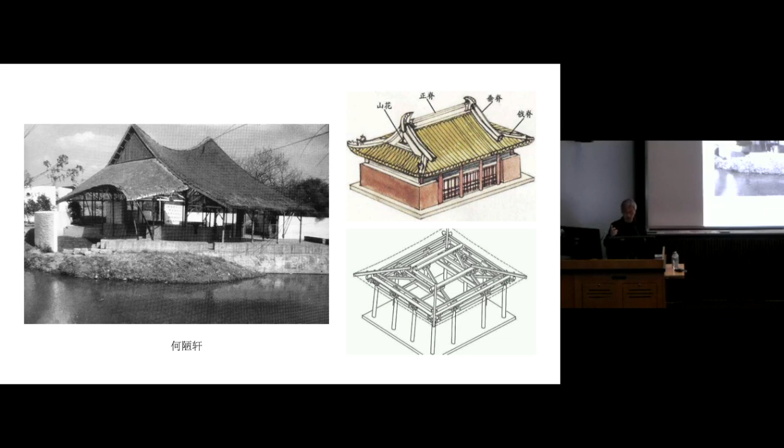The roof of the pavilion follows the form of the xieshan roof—maybe in English we call it a saddle roof, I don't know, in Chinese traditional architecture. But apparently the pavilion is built differently from the systematically xieshan roof. Deciding on a certain style of roof is surely an intentional cultural choice, because it is in a park with an existing tower from the Song Dynasty, and the architect wanted to respond to the Song Dynasty legacy with such a building—both related and keeping a distance in time.

It combines local bamboo lashing techniques with contemporary roof structures to present a free structural form. It could not have been carefully calculated, but it manages to perfectly support the roof, cover the space, and adapt to the intentional height difference and horizontal twist. Yet every pillar just fits the cross point of the square paving.

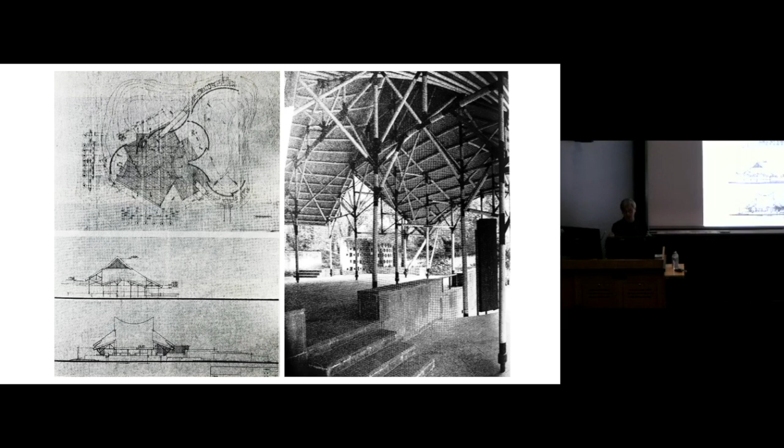The architect gave up the modern construction system and left the construction of the structure to the craftsman, but in an interactive way influenced the craftsman's working. In general, this modern design made an Asian architectural form more primitive.

These three architectures range from a somehow casual design to a formal one. They share certain features, from relatively informal to formal structure, which results from the sensitivity towards the site, the materials, the climate, and even cultural conditions. So it's rational, and finally it completes a kind of structurescape.

A structure created in this way is not just a specific structure, but also a poetic composition or decomposition of the building system. They are all tectonics and originated from the region, but after maturity it was linked to the region's countries, such as Chinese timber architecture or anything else. But modern technology has deeply changed the regionality of building systems. The important thing may not be the change itself, but the new opportunities in the change, the possibility of new poetic construction or something else.

The sunshade looks like a casual decision, but reaches a sensitive balance and plain poetry. It does not just refer to a structural balance, but also to the synergy between that contemporary black shading cloth and the age-old archaeological sites it covers.

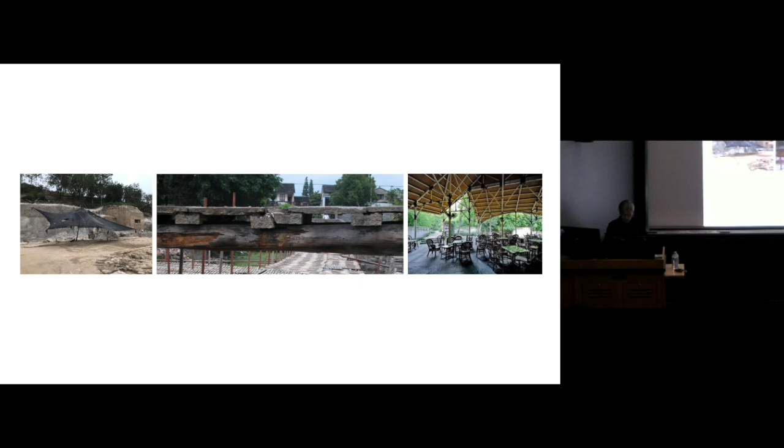This is the Long Museum West Bund. We began to work on it since the end of 2011. The site used to be a wharf for transporting coal. Most of these industrial wharves moved out of Shanghai since Expo 2010. This photo was taken in 2008. Now it's become a public space of the city.

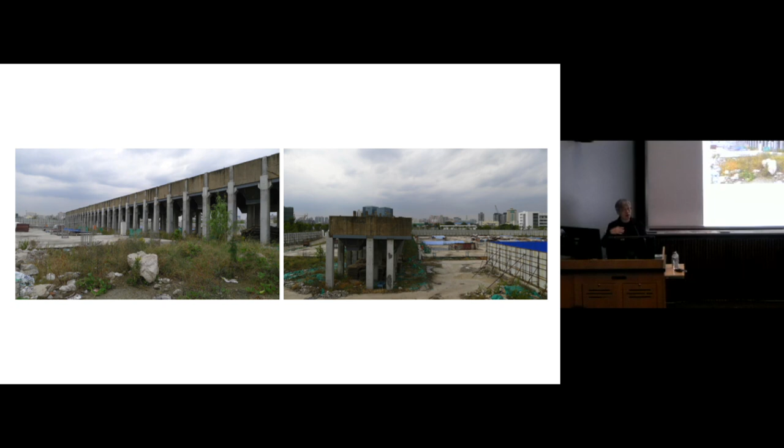When we started this project, a two-story underground car park surrounding the coal unloading bridge was already built two years ago. However, this coal hopper unloading bridge was preserved. It's around 100 meters long and 8 meters wide. This is the plan and section of the formal design for the existing basement. On the right is how it would have looked, planned to be a tourist service center. The part above ground was not built.

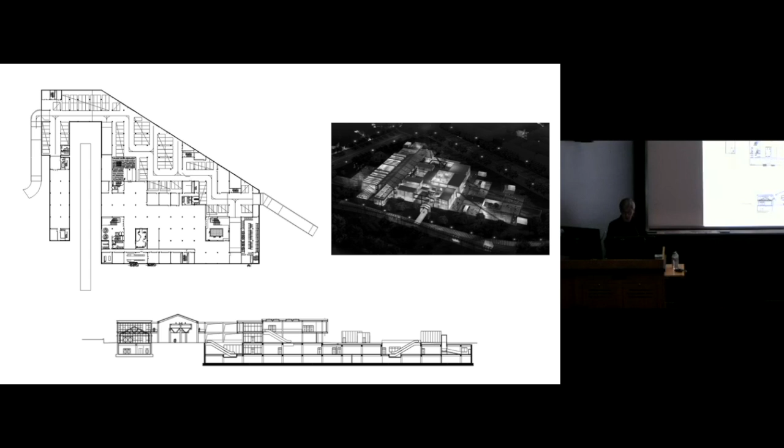We can see the underground structure plan is a standard 8.4 by 8.4 meter column grid, designed for the economy of car parking. Since most regions in China require the design to be strictly earthquake-proofed, normally whatever the function is above ground, the underground structure would simply extend upwards. The columns would be wrapped in division walls or exposed in the space with no direct relation to the specific functions, just supporting the floor plates of the building to provide usable space.

On the opposite, here we see this hopper for coal loading. Even though it lost its function of transporting coal, we can still read from its structure the body of the trains and how the coal was transported there. It shows a simple but strong will in the making. The meaning of the structure is certainly suspended as the function is removed.

This somehow represents the destiny of an architecture in the future. If a city is willing to preserve these structures without a function, it means architecture has to prove a value beyond its use, but it starts exactly from functional purpose. This should tell us that only if the structure of the architecture can also carry a purpose, such as a purpose for use, can it retain more lasting historical value.

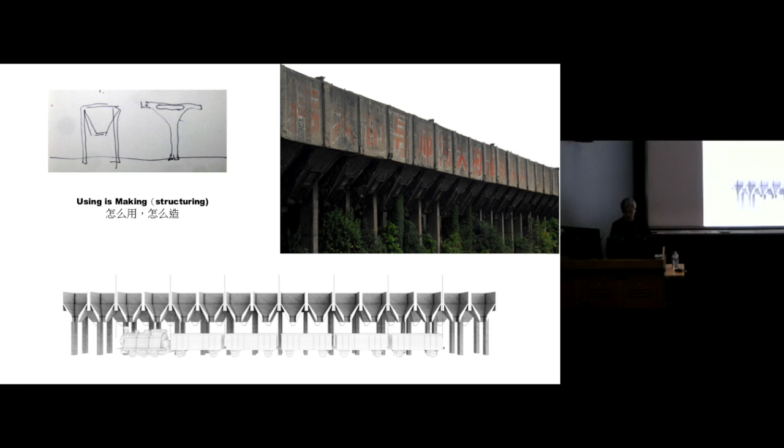We had to design an art museum on such a site. Traditional art museums originate from palaces and villas, and this layout of going from room to room has always been a standard pattern for museums.

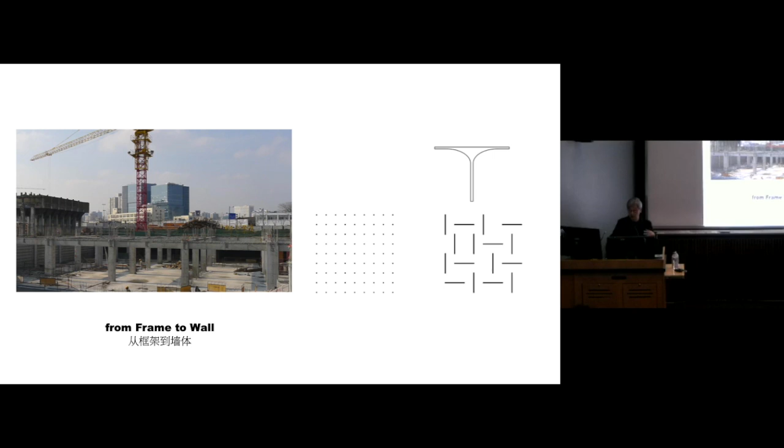I came to realize that paintings and artworks are attached to the walls, not the rooms. It is possible to have a more flexible layout, so we came up with a space with independent walls where people can roam around to see the exhibitions. These independent walls are built upon the standard 8.4 by 8.4 meter column grid of the existing basement economy car parking. Thus, an art museum has adapted its function to its structure through arranging the walls, and has adapted to the existing column grid system too.

Sure enough, the special thing is it is not just a simple vertical wall, but a wall structure combined with a covering roof. In fact, the walls, each made of two pieces, climb the old structure, growing upwards and expanding into individual structures we call vault umbrella units. They group with one another until they cover all the exhibition space.

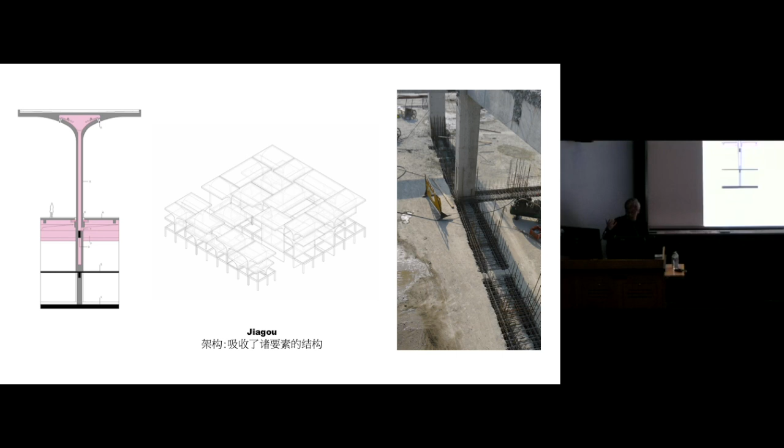The void in between the walls, shown as the pink part, is for mechanical equipment. Thus, as we figure out the adaptation of structure and function, we also deal with the mechanical system, and together they solve the spatial issue. The spatial issue also includes the gaps to allow skylight, as we make each vault umbrella unit independent as a complete structure, detached from one another.

This is how a functional concern also works out for the atmosphere. Of course, material is also relevant, as cast finish concrete.

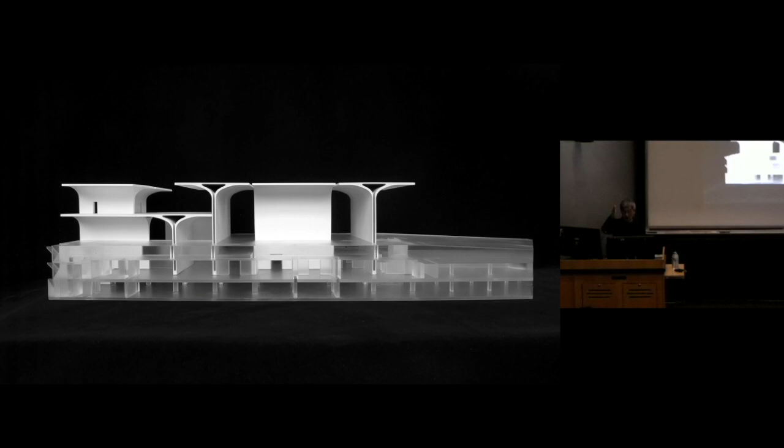In this model, we can see the relationship between the new and the old structure. The new walls are based on the original column grids, but form a rather free exhibition space. Sure, there are many ways to combine the walls.

Finally, we decide on a layout with diverse spaces that are symmetrical, rotational, or diagonal. The fluidity of the space is important, and it's the simplicity of the very structure resulting from various intentions that build up an analogy with the existing coal hopper on the site.

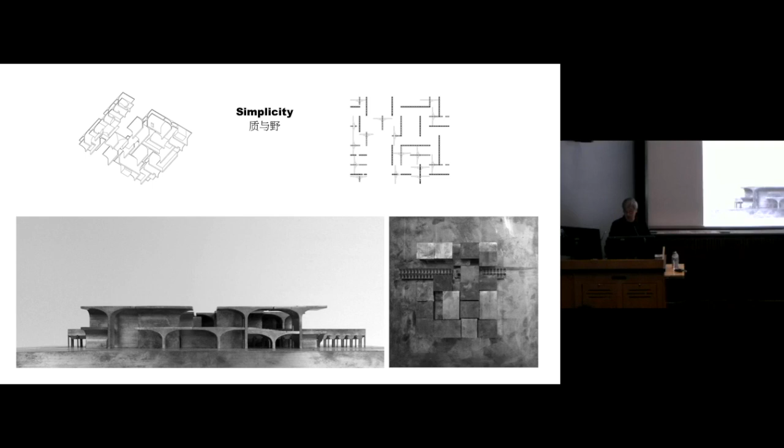When we describe the notion of covering as tree or umbrella, we are actually mentioning the human body. This is a metaphor based on the perception of our body. From its point of view, there is not much difference between Chinese traditional timber architecture and this concrete architecture.

In the summer, when I was walking in this temple from the Jin Dynasty, I immediately thought of the just-finished Long Museum. A photographer, Walter Mair from Switzerland, asked me for keywords for this space during his photo shoot. I did not think for a second. I said ruins. He demanded to turn off all the artificial lighting and took this photo.

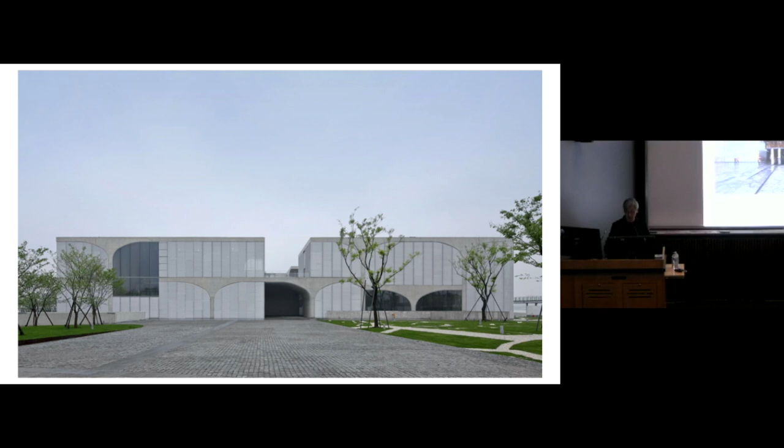The new structure of the museum, along with the existing coal hopper unloading bridge, forms the public space leading from the city to the riverfront. On the facade of the museum, we can clearly see the structural and spatial composition of the architecture.

The interior space is also made by the concrete structure unit, a vault umbrella structure. In this space, numerous exhibitions took place. Every exhibition seems to be tailored.

They all reacted to the space, each in their own way, and so each one of them is unique. Even though the space is so strong and remains the same, people still remembered almost all the exhibitions in this space. These photos show the activity of people inside and outside the building. It has become one of the most important and cultural spaces of Shanghai.

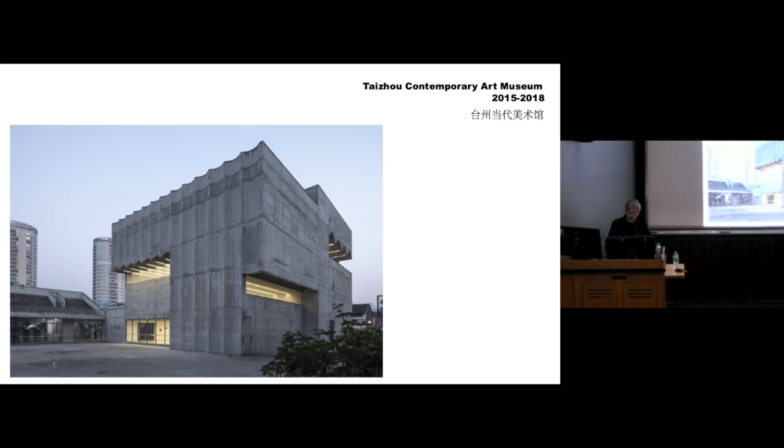This is the next project, Taizhou Contemporary Art Museum. The design started in 2015, soon after the completion of the Long Museum. Taizhou is a small city in the south, about 3 hours from Shanghai by high-speed train.

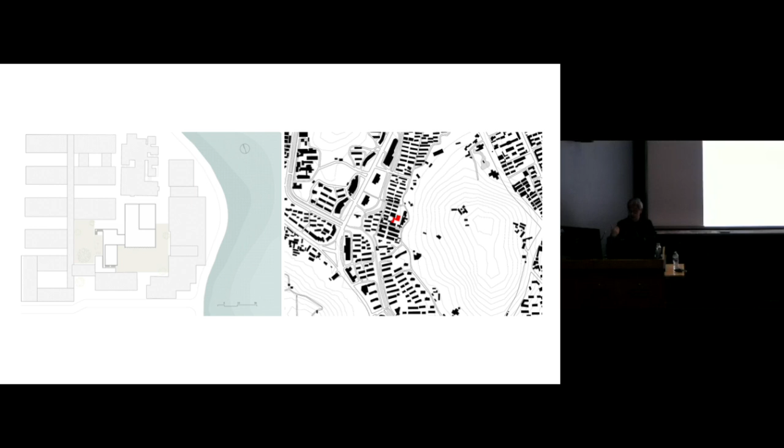It sits in a former grain depot area, which had been transformed into a commercial area. The developer keeps a piece of the land for a small art museum, and to the south of the museum is a small plaza, facing a mountain to the east.

In an art museum not that big, we don't want to take too many stairs to reach the next level. We designed a staggered space for exhibition so that we can go up only half a level to reach the next exhibition hall, and we cover the space on each level with parallel vaults.

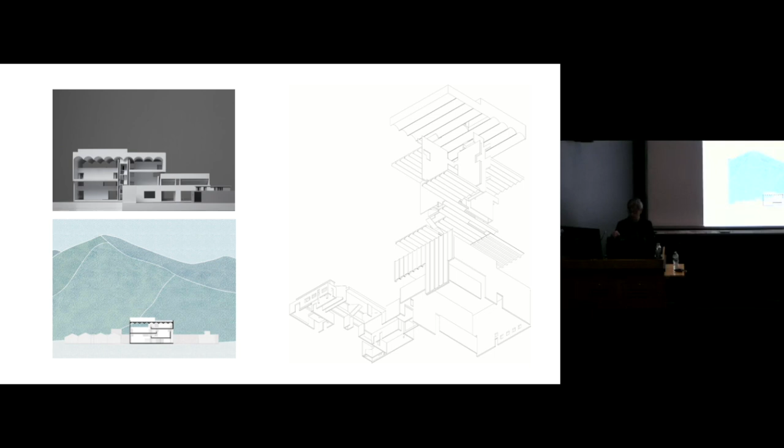These are two model photos. The left one shows what's unusual about this structure. Normally, such a strongly directional vault structure would be supported on both ends, but here, the end of the beam is missing. We can see on the right, actually, the end beam is just upturned.

The upturning structural beam made the vault structure seem like it is floating in the air. The mountain in the distance is involved into the building. On some other facades, the floating vaults are placed upon semi-transparent glass.

On the inside, this seems to be a liberation of structural force, followed by an acceptance of the exterior environment with a certain attractiveness, but on the outside it still looks very solid.

The facade facing the plaza also applied walls with a similar wave form. It seems like the interior is unfolded to the outside due to constant construction errors and discontinuous building process. The facade of the building presents an unexpected texture.

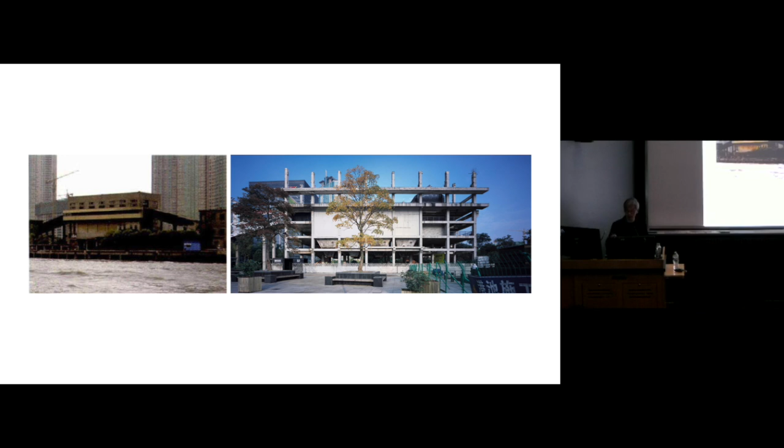It is an art museum and an additional walkway. It was also a coal bunker, almost demolished completely under our suggestions. The client agreed to retain this original ordinary industrial structure. By the time the roof and part of the walls had been removed already, it had to be pulled down because the existing structure could not meet the functional need for the new building.

And the client never thought that the enclosed hoppers could become an exhibition space. We applied a huge roof truss on the top and hung the new structure below, which formed the cantilevered additional surrounding space. Thus we can prevent the destruction of the existing structure. It had been inserted into the existing structure.

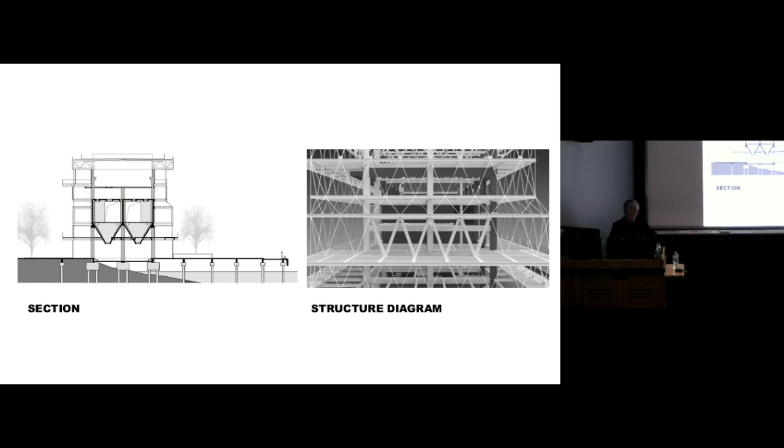When we looked at its new structure attached upon the existing old structure during the construction, it seems like fishnet leggings, or also the artwork wrapped trees by Christo and Jeanne-Claude.

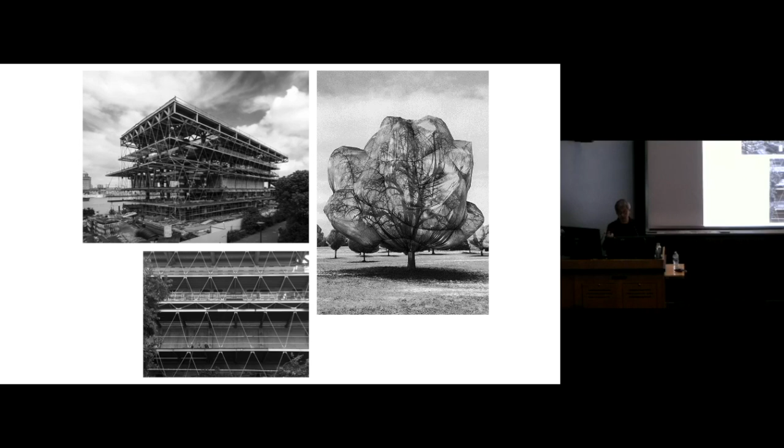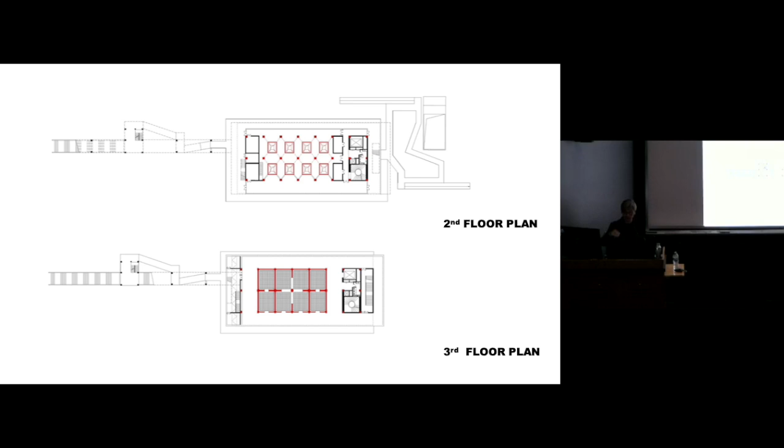The existing structure is in red, and surrounded by the suspended structures are increased exhibition space. The building has a brand new appearance. Apart from the steel stairway on the left, we can barely see the trace of the old building.

This suspended structure also adds exterior open space to the building. The platforms and corridors build up a sense of publicity and landscape, which the former enclosed industrial buildings did not have.

A brand new architecture has an old coal bunker at its core. The entrance hall of the building is covered with the existing coal hoppers. The contrast between the inside and outside is also unique to this architecture. Exhibitions can be held in between and even inside the coal hoppers.

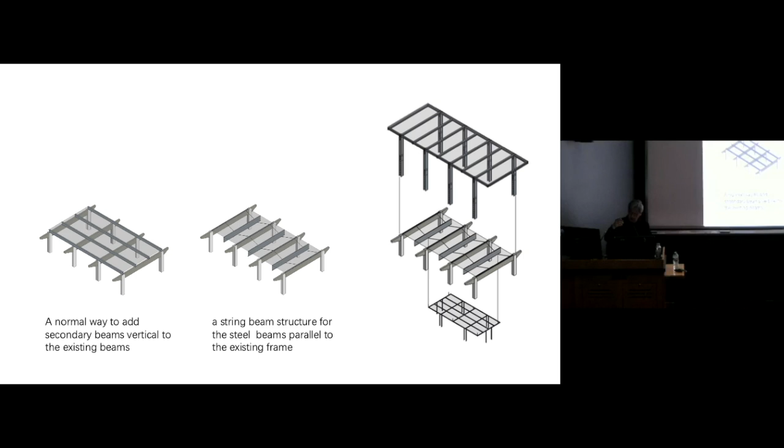So we thought it through and applied a string beam structure for the steel beams parallel to the existing frame. It seems like the structure is somehow floating in the air, but seeks to stress and distinguish the existing frame beams. The glass boxes suspended from the new steel string beams are flexible retail spaces.

The new structure seems to be just suspended there. The existing structure seems just like it's right here, as natural. On the rooftop is an elevated walkway along the Huangpu River.

A newly built architecture seems like it has been there for a long time. It is not only a part of an art museum, but rather a part of the city, the riverfront.

This is our old office. Following the completion of the Long Museum, we also moved our space to the West Bund. We became closely related to the urban regeneration of this area. This space used to be the repairing zone of the Shanghai aircraft manufacturing factory.

A main warehouse is transformed into the West Bund Art Center. Surrounding it, some temporary artist and architecture studios are also built, along with some art galleries. Our office is among them.

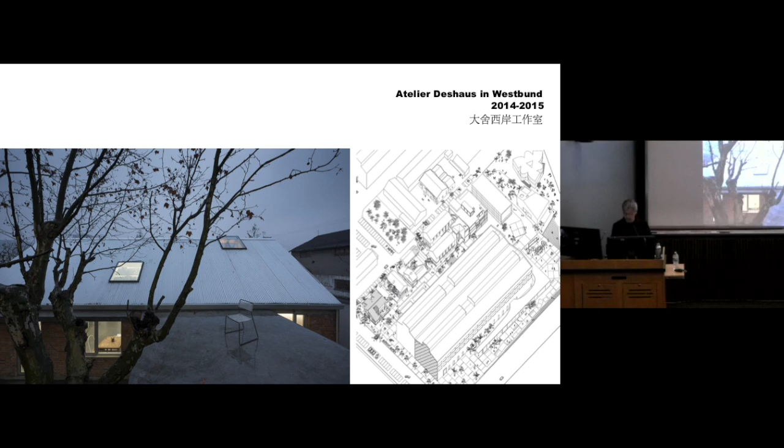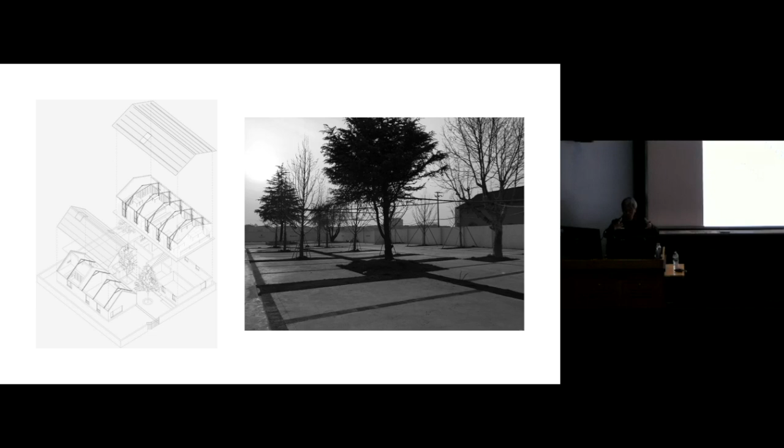The site of our office is in the parking space of the former aircraft factory. We wanted to reduce the cost by using the existing concrete ground of the parking lot as the building foundation. The two trees at the front would be enclosed in the courtyard.

Building directly upon the parking lot, a concrete ground, instead of building a new foundation, leads to the decision of applying a brick wall structure on the ground level, so as to distribute the load transmission. And so on the ground floor is mainly small functional space.

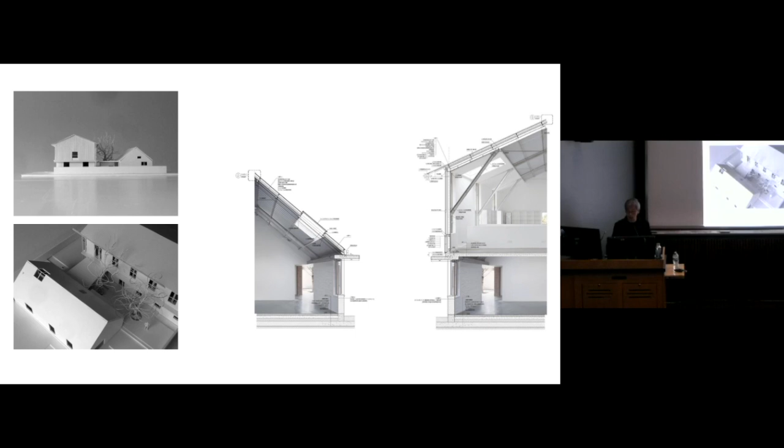On the second floor is a large space with a light steel structure, our main workspace. This is a workspace on the second floor.

One special thing, we put the main structure column at the middle of the window, so that the columns and window frames are merged together, and the steel columns can get rid of the cold bridge effect with the heat insulating window frames, so that the walls of the upper floor don't have to be too thick.

The structure is also clearly presented in the space on the upper floor. The supporting roof truss is an important element for the spatial atmosphere. It is also related to the industrial history of this space, but the structure is not completely exposed. A section of the ceiling makes it bright and comfortable.

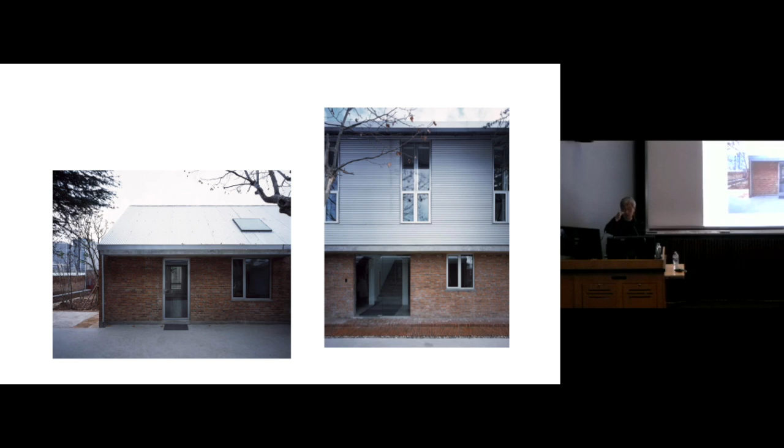The elevations of the buildings honestly reflect the relating structural forms. The skylight of the ground level meeting room and office let the trees become a part of the shelter of the space. The sunken part of the rooftop terrace guides the rainwater to where the trees are.

This is a tea house in the same art village, just near our office. Also in this art village, also demolished this June. It is located in...

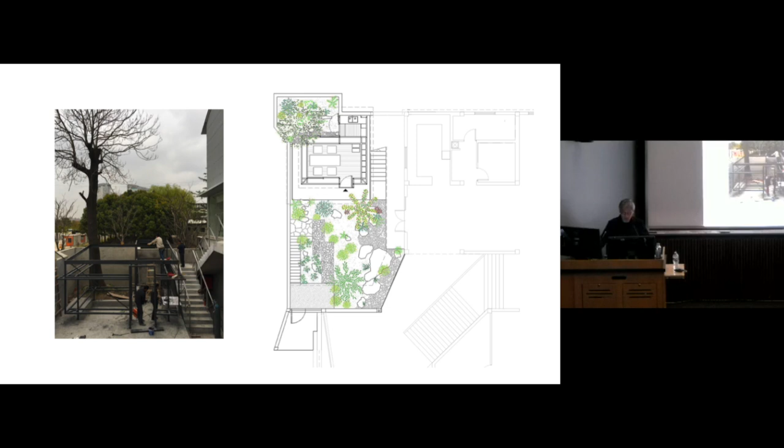It was located in a 110 square meter courtyard, a courtyard with a tall tree. The yard is tiny, especially compared to this tree.

The tea house closely sits on the tree side so as to make space for the yard. It makes the tree seem not too big in the small yard. Another benefit is that the tea house would appear to be really small.

The tea house uses really thin steel structures with all columns and beams at about only 6 centimeters wide. Compared to the tree trunk of 90 centimeters wide, the columns and beams of this width barely count anymore.

Usually in our architecture of wooden structure, the size of the beams and columns are the same size as the tree trunks. In order to reduce the footprint of the tea house as much as possible, we also turn the interior seats into part of the architectural structure and elevations.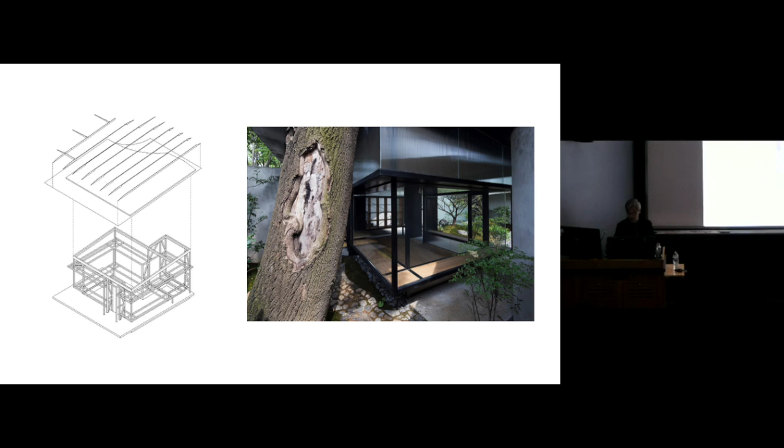We can see on the left the envelope structure of the building is cantilevered layer after layer. Also, because the tea house is reduced at its lower part, in reverse, we would hope to rather expand the upper part so that it would not feel too packed on the inside.

Our demand for space on the upper part is much larger than that on the lower part. As for the yard, the house should take up as little space as possible. So on the envelope of the building, we can see the seat height at...

45 centimeters, a human standing height at 1.8 meters, and the roof height at 2.5 meters. Architecture is a metaphor of human bodies, human scale.

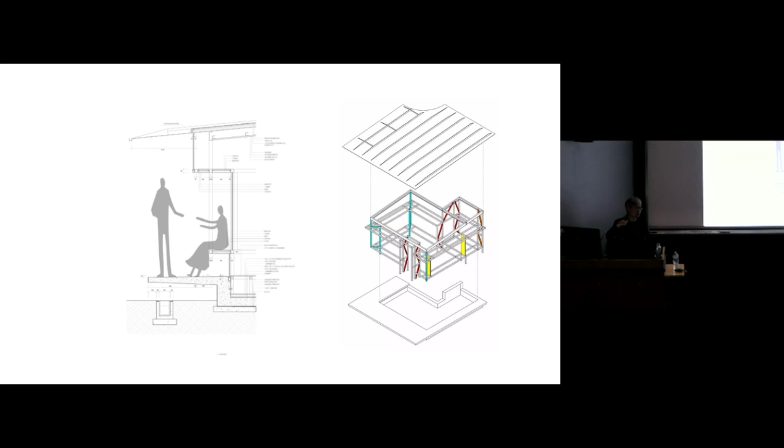Meanwhile, the architecture of furniture is also blurred due to the scale of the structural elements. Structure is both of architecture and of furniture. In this way, a direct connection is created between our body and architectural structure. The architectural body shows the intentions of support and function. They became components with multiple meanings.

Because of the close distance and the dim light enclosed by the backyard, the interior actually feels like it is expanded through the glass all the way to the wall. This is the top view.

It seems like the architecture covered almost as much as the yard is left with. But on the ground, the yard does not feel smaller than when there was no architecture. It actually feels bigger since the space is further layered.

This is a pavilion designed for the 1+1 exhibition, part of the Shanghai Urban Art Season of 2015, which is held every other year. An architect and an artist work together to create a spatial installation. With this installation, I try to present different understandings towards Chinese rockery from the perspective of an artist and an architect.

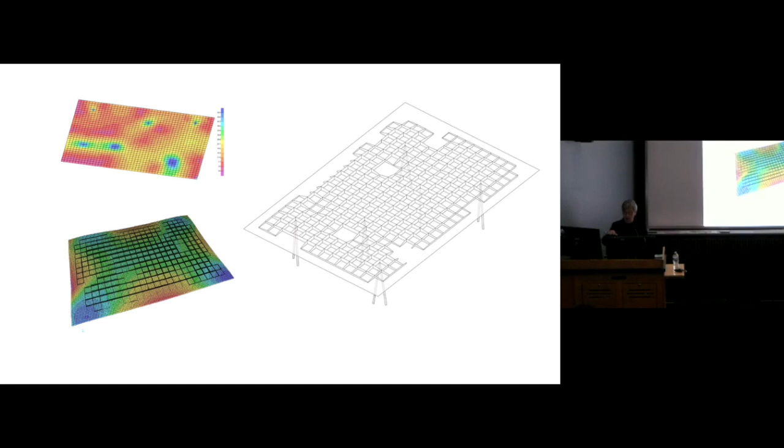When the locations and directions of the support are changed, this creates a different spatial outcome, and the load-carrying situation of the roof is reflected in deformation and bending moment nephograms. Based on the eventual space, we have the nephogram, and the structural engineer decides the distribution of the upturning ribs.

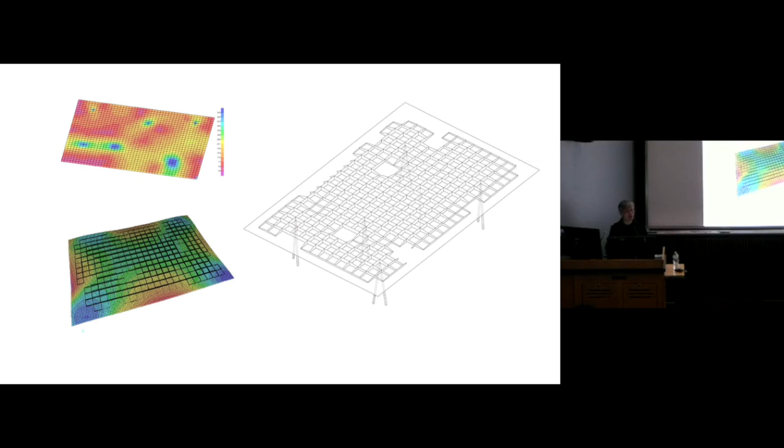The ribs are also used as planting pools on the roof. If there had not been a concept of the rockery, this might be a pure engineering spatial construction. The shape of the rockery adds cultural significance to the space.

Sometimes we cannot tell which one is prior to the other. I mean, sometimes we want to detach meaning from something, and sometimes we bring in preconceived meaning, a choice of the building intentions, as much architecture is, after all, an expression of meaning.

This is the Riverside Passage, designed in 2018. It is also along the Huangpu River in Shanghai. The site used to be a gas factory wharf, also for coal transporting. There was a 90-meter long and 4-meter high concrete wall, built to prevent the coal from falling into the river.

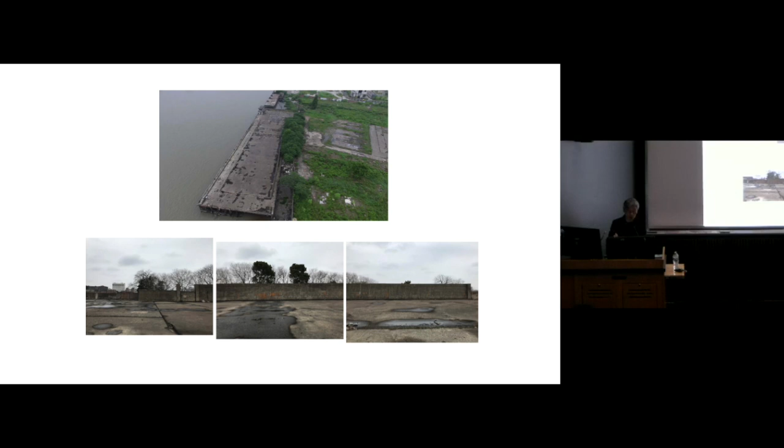It got the name Riverside Passage from a conversation I had there with Professor Yehuda Safran. He asked me how we should define the space with a certain type - is it a balcony, a passage, or a pavilion. Riverside Passage is a conclusion we came up with right then, but now, if you ask me, I might want to call it edge of garden.

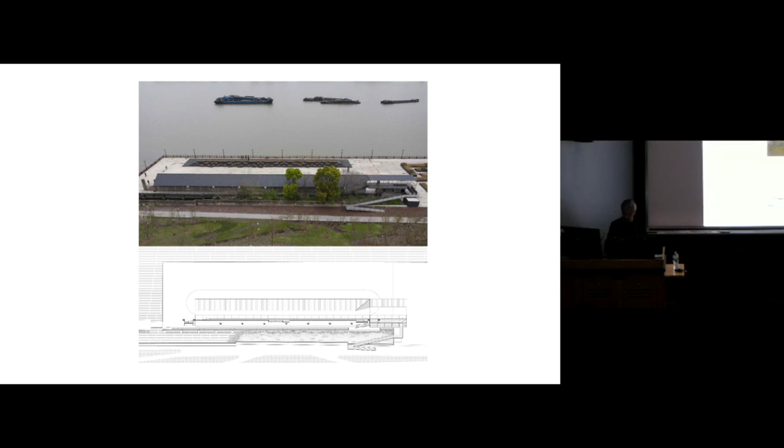There were actually 2 walls on the wharf. One of them has been broken down and left in the gap. As the wharf was abandoned later, the place turned into ruins left behind by the city. We hope to transform the place into a new urban space with its current atmosphere through a modest design.

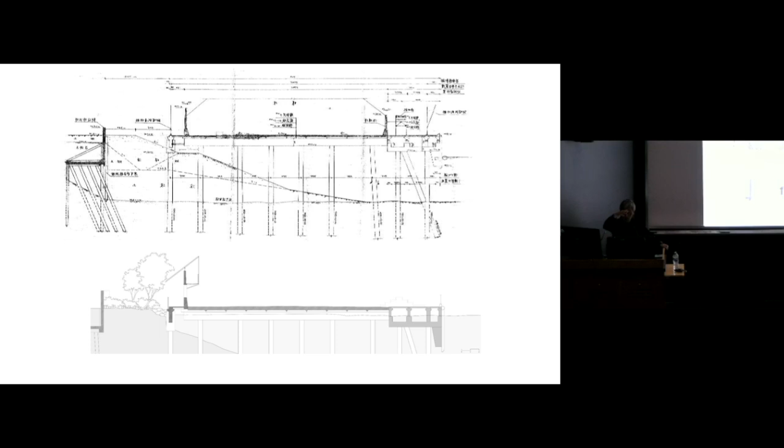We applied a single pitched roof onto the wall and clearly defined the space on both sides. On one side is a lower corridor relating to a small-scale garden space in the gap. The other is a lifting platform reacting to the large-scale riverscape.

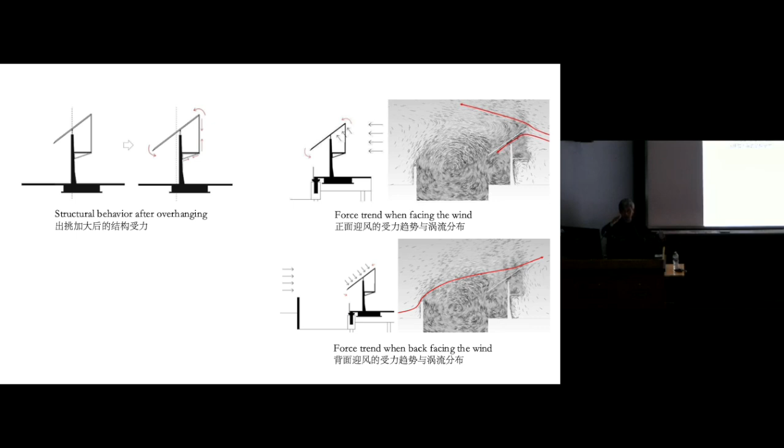During the discussion of the structural rationality of the eave dips, we realized that the wall across the single pitched steel roof has a delicate structural force on the roof. Its impact on wind control makes this wall not just for spatial enclosure. The notion of the flood control wall and the pitched roof as one structure might only be perceived on the intellectual level, but I believe the subconsciousness of the body can sense more internal relevance.

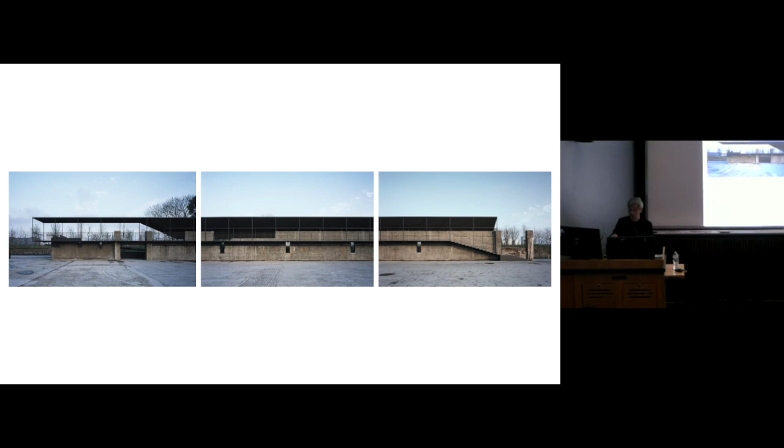The new roof changed the role of the wall and the space as well, but the features and atmosphere of the original place are still there. This is a pavilion, a balcony, and a passage, a place where one can feel free to stay or pass by. This is a place of a landscape. It carries with it the trace of urban infrastructures in a metropolis. You will find a duration of time here.

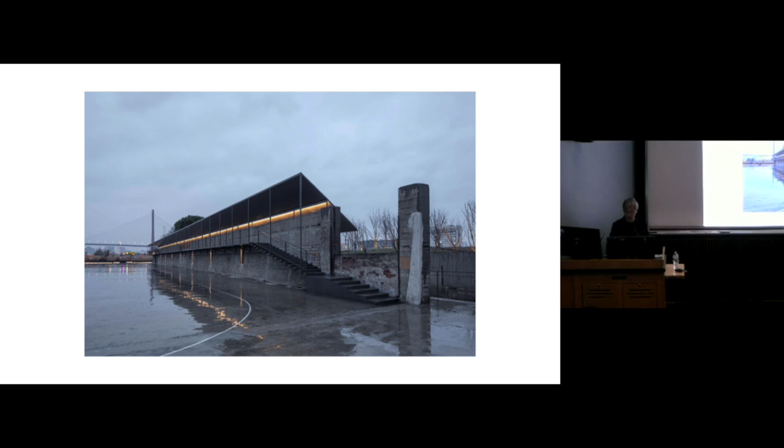The wharf ground is polished to be a skating rink. The place becomes a vivid public space for daily activities.

The garden, this is the garden in the gap. The fragments of ruins are preserved here. In fact, it is hard to keep it in such a state of wildness in Shanghai, so as to prove its once remote being in the city. The government always wanted to be modern and beautiful everywhere. A scene like this is usually described as bleak.

Fortunately, biologists find a kind of bug and a kind of moss here that had disappeared in other places along the Huangpu River, and the beauty of the wildness gets to survive finally because of the ecological reason.

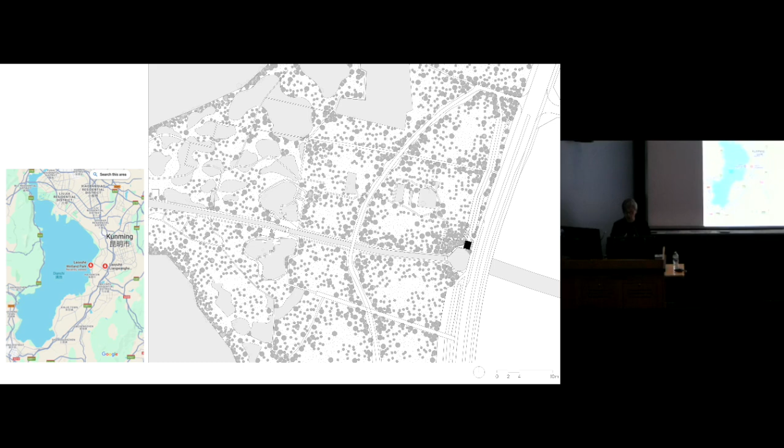This is a pavilion that has just been completed recently in Kunming, Yunnan, China. It is located on the lake shore of Kunming's famous Dianchi Lake, which was polluted for a long time. The local government built the Laoyuhe wetland park and planted a lot of trees to filter the treated sewage discharged back into Dianchi Lake. The name Laoyuhe means a river where you can catch fish, and there are a lot of small fish in the wetland, so many people come here to catch fish.

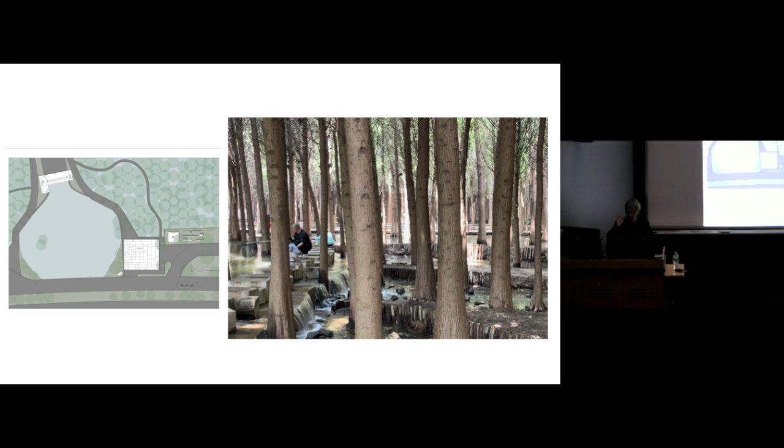Last year, the Kunming government held an art festival here, and we, as participant architects, were arranged by the curator to design a pavilion that would serve as an entrance to the festival and also an entrance to the Laoyuhe wetland park. Building a pavilion by the woods at the edge of the lake reminds me of Chinese landscape paintings.

There are many landscape paintings in China where there is always only one small pavilion standing between the mountains and rivers, such as this painting by Ni Zan in the early Ming dynasty, called Qiu Ting Jia Shu Tu, meaning a pavilion in the fall with beautiful trees. In the vast landscape, the pavilion is a small point, but it is given an important place in the painting's name. This is another landscape painting called

Songlin Tingzi Tu, which means a pine forest pavilion. So this should be the forest pavilion, the Metasequoia forest. This is also Ni Zan's painting, Rongxi Zhai Tu, and the name of the whole painting focuses on this small pavilion, Rongxi Pavilion, meaning a pavilion that can only accommodate knees. Of course, the real meaning is that man cannot bend their knees easily, which means they must not lose their will.

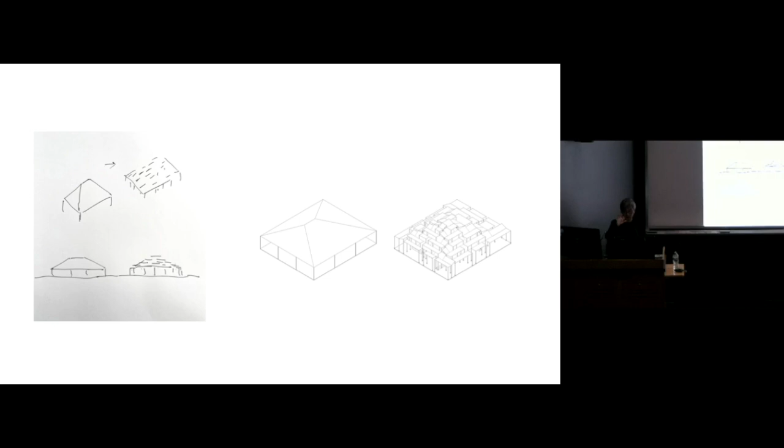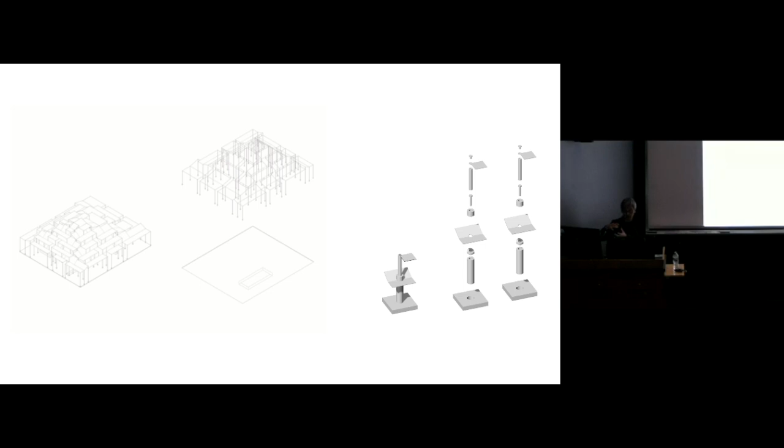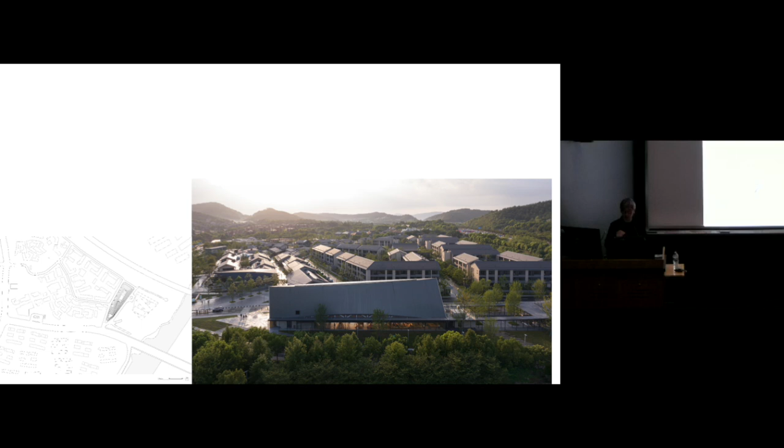This is the town center of a community called Yuniao Liusu in Hangzhou, located on the northwestern outskirts of Hangzhou. It serves an up-and-coming satellite settlement, and in the mountains in the distance lie the 5,000-year-old archaeological ruins of Liangzhu city. The archaeological ruins of Liangzhu city were discovered just in 2007 and inscribed on the World Heritage List in 2019. The Liangzhu culture is representative of China's Neolithic

rice culture. And when I visited the Liangzhu Museum in 2015, I happened to find the figure of this Asian house on a piece of pottery, which looks like a stilt house 5,000 years ago.

After the appearance of this figure, 2,000 years later, the Jinwen bronze inscriptions in the Western Zhou dynasty revealed a character for house, 'she,' which is composed of three parts: ji, cao, wei, meaning gathering, straw, and enclosure respectively. Its graphics represent the roof, beams and columns in the middle, and pedestals or territory respectively. The Chinese architectural historian Lin Huiyin called it the three elements of Chinese house architecture.

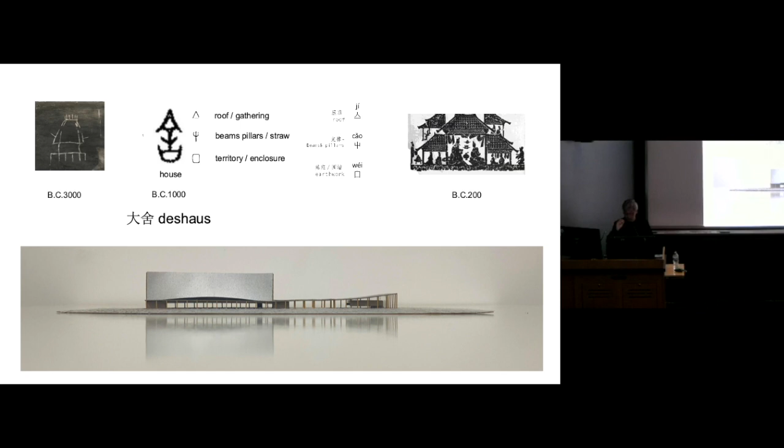The roof of the house was twisted due to environmental factors, and in order to make the facade on both sides of the building more open, we use a long structure instead of a short structure, just like a bridge, spanning the distance between the two gables in the north and the south.

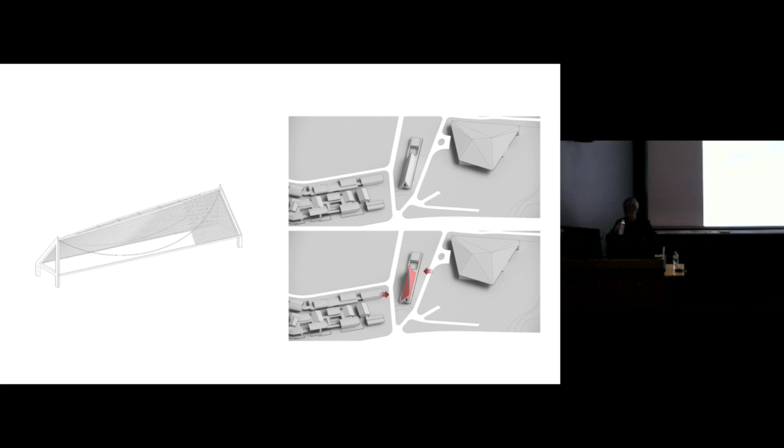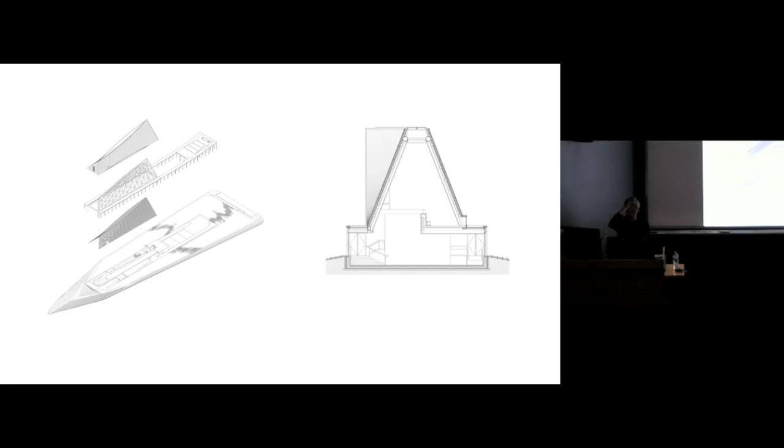Unfortunately, the client insisted on using a steel truss structure because they were worried that the timber structure of the tensioned string beams was not safe enough, but I still decided to use the vertical array of timber beams to cover the steel truss structure, because this is the atmosphere of the interior space originally envisaged.

There are only slender steel columns on both sides to guarantee an open view. The building is placed on a pedestrian path about the height of a table.

Once inside, the space sinks again, and people sit down to look out as if the ground is just right in front of them. This is the second story attic designed as a reading space for the children, where children can sit on the floor and have lower windows to look out.

This is a photo of the building before it was opened. The building is thin, and the roof seems floating above the ground.

Here are some details. Behind is a curved wall, and behind the curved wall is the staircase. From the rooftop view, the building looks just like a ship.

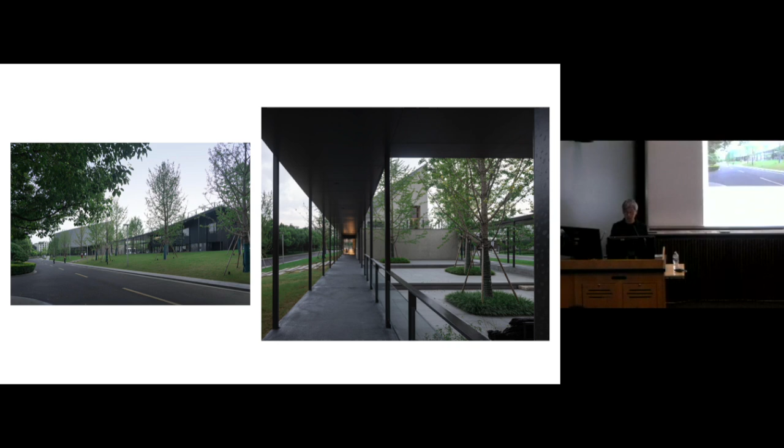This is a cloister on the side of the building and the porch space at the entrance. This is a courtyard in front of the restaurant and at the back.

After being built, the local people call it a big barn. And I think this is the impression created by this kind of timber-made interior space, which is a metaphor of barn, a barn structurescape. One day I was surprised to realize that the front facade of this building is just the character of the word barn, 仓.

The word is composed of three parts: 亼 means the roof, 户 means just the door, and 囗 means the territorial. It just means a single door.

In ancient China, people say that the door usually refers to a double door, but a single door means more close, simple, so that the single door is the door for the warehouse.

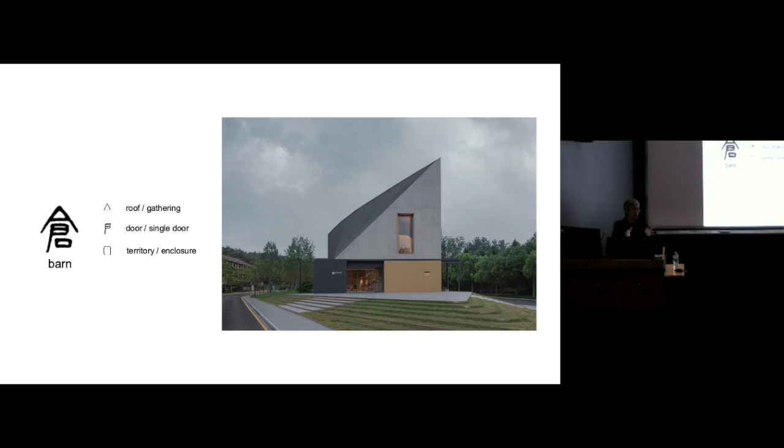The last project of the presentation is the upper cloister in Golden Ridge, sits in the valley where Beijing meets Chengde. It is a meditation space designed for the Aranya community.

We call it cloister at first, because in the history of Chinese temples, a Zen temple of Buddhism is a place where people introspect themselves. But today, a temple as a place of religion has gradually become a place of sightseeing and praying.

How should a contemporary place for introspection in China look like? This is also our expectation towards this project. The site is to the northeast of Beijing, facing a length of the Great Wall from the Ming Dynasty. In the meantime, it also faces Beijing.

The special location also reminds me of the Foguang Temple from Tang Dynasty on Wutai Mountain in Shanxi Province. As it faces the valley, it is also facing the remote capital at the time, Chang'an City. This is not a coincidence, but intentional.

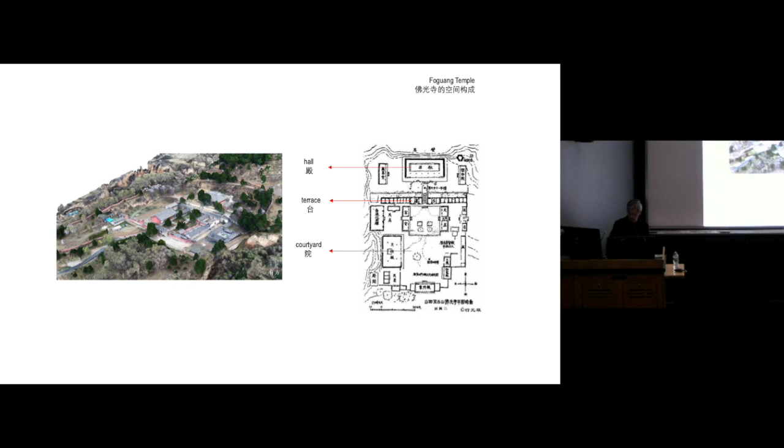The spatial sequence of Foguang Temple can be put into three spatial types in general: the courtyard, the terrace, and the hall. The most famous part today is the east hall of a wooden structure on the terrace, but it is also impressive to see the splendid valley cross it and the rays of light at sunset.

From the courtyard, a folded space, to a terrace, a place that gets the body to tighten up, and to the hall, a formal and purposeful space. The series of spaces both adapt to the sloping valley and implies the rhythm of tension and relief during the scenic experience. This is also the reason why this spatial composition is eventually introduced into the upper cloister project.

This is both specific and abstract. What's different between the two is that the Foguang Temple sets the spatial sequence from bottom to top, and the cloister here puts it from top to bottom. This is determined by the arrival spot and also where the upper cloister got its name, Shangyuan upper cloister.

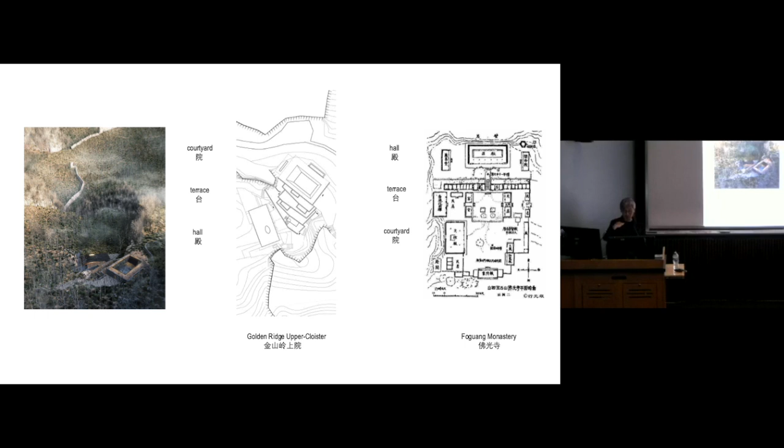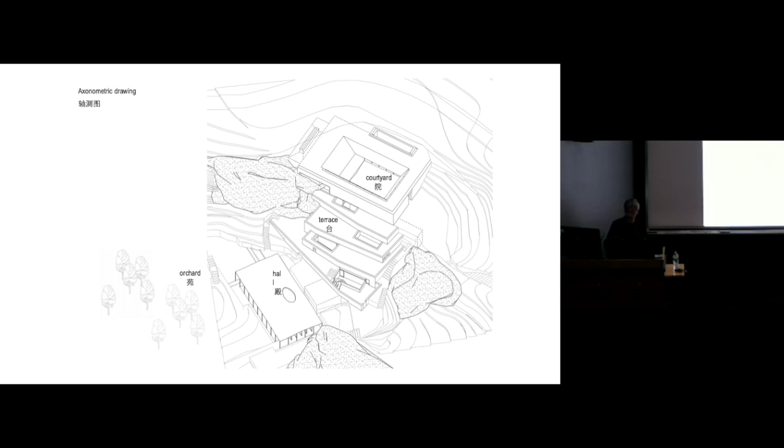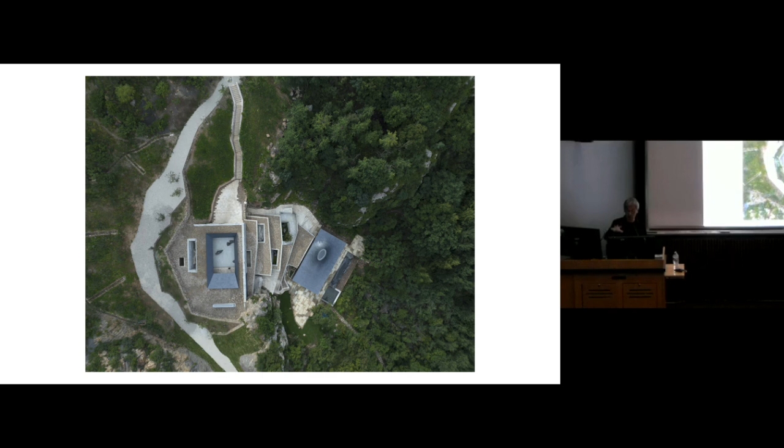Of course, the most important thing is when I saw the Great Wall, I knew I should do something as an echo of the past. This is the actual axonometric drawing of the project. This is an aerial bird view after its completion. We can clearly see its spatial composition and its relation to the terrain.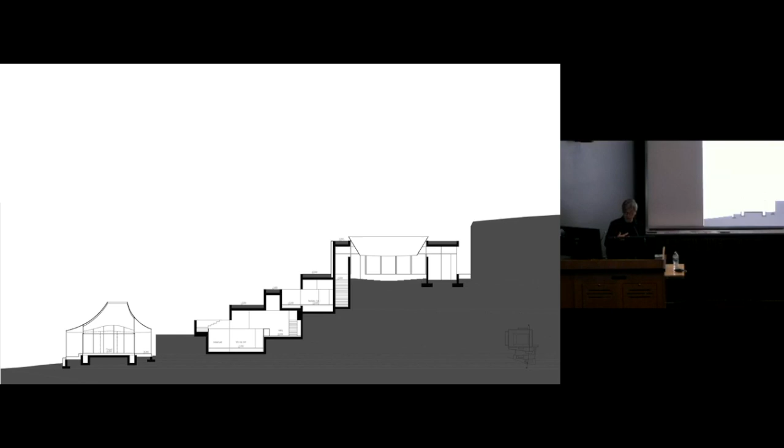The section drawing can show us more clearly the combination of these three spatial types. The terrace architecture in the middle is actually a space of artificial mountains that one can go here and there inside, and the suppressed body waits to open up to the valley when entering the main hall.

This is the entryway. We can see that the courtyard on the upper part looks very enclosed from the outside. But when entering the courtyard, one will find it open to the sky and the mountains far away. The courtyard of stones is enclosed with a sloped roof of thin steel plate and concrete walls.

The steel pillars supporting the black steel plate roof also support the concrete wall. The eaves corridor, covered with steel plate, is actually compressing the corridor with steel pillars onto the concrete wall, and the width of the corridor is reduced to zero here. It becomes a pilaster corridor, or an eaves corridor.

The eaves corridor provides an atmosphere and a frame of landscape of the mountains and the sky. As the sun sets over the rocks at the summit, it reveals why this area is called Jinshanling, meaning Golden Ridge. When the sun sets, the peaks here become golden.

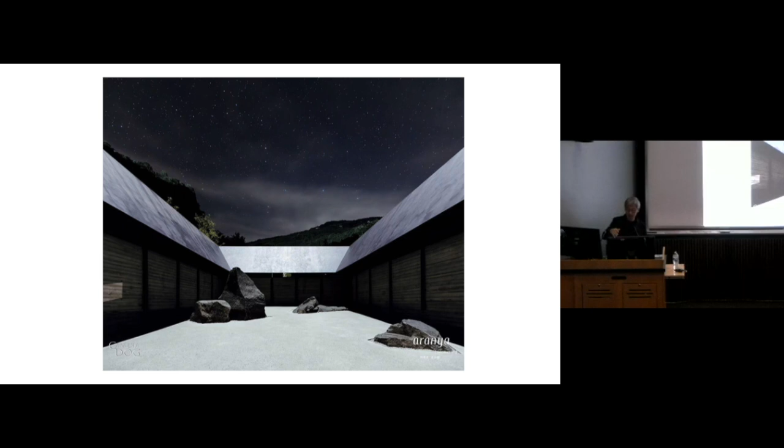And in the moonlight at night, the ground of the courtyard becomes incredibly bright, and these stones resemble several small hills in the sea. I named this stone courtyard Wu Jing Yi, meaning infinity, or immersed in.

The Buddha hall next to the stone courtyard has a natural stone sculpture outside the window. You may see a woman-like shape in the stone.

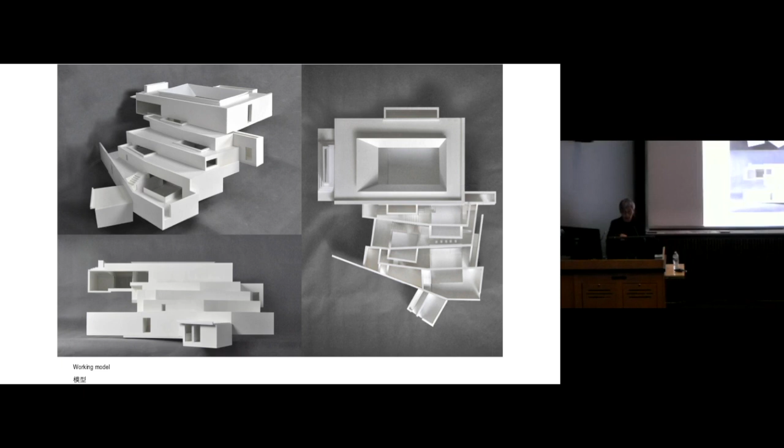This model photo shows the courtyard space on top and the terrace space in the middle, closely combined with the topography. In fact, every time the architectural volume drops, it drops with the height of half a level, 1.6 meters. This also blurs the definition between the architecture and the topography, the terrain. It is somehow close in scale to the terraced fields where local farmers grow crops.

The terraced space of 1.6 meters high also brings a special spatial atmosphere to the interior. It is basically the height of a human body, or a person's eye level, and so the interior suggests the scale of sitting on the ground.

Thus, one can see the mountains up high above the yard in front of the windows. The surrounding scenery and light also come inside through the interspace of the architecture. The concrete box inside is actually the meditation room, and the courtyard in front of it brings a feeling as if we were in the belly of the mountains.

This is a reading room and its courtyard. At the bottom is a Zen hall. It is a pavilion with a curved roof supported by slender steel columns.

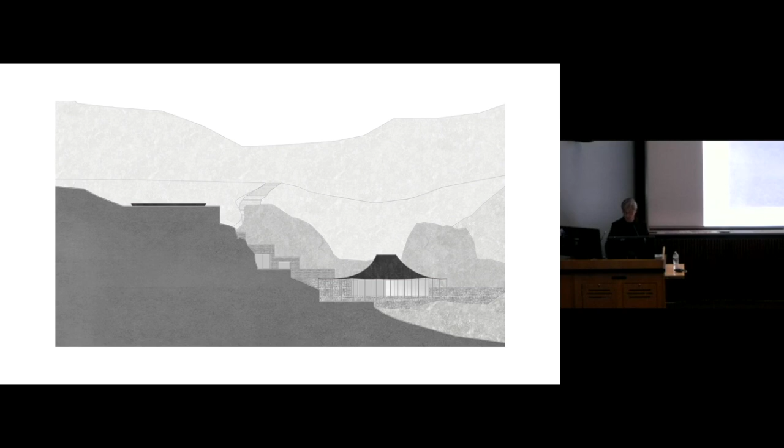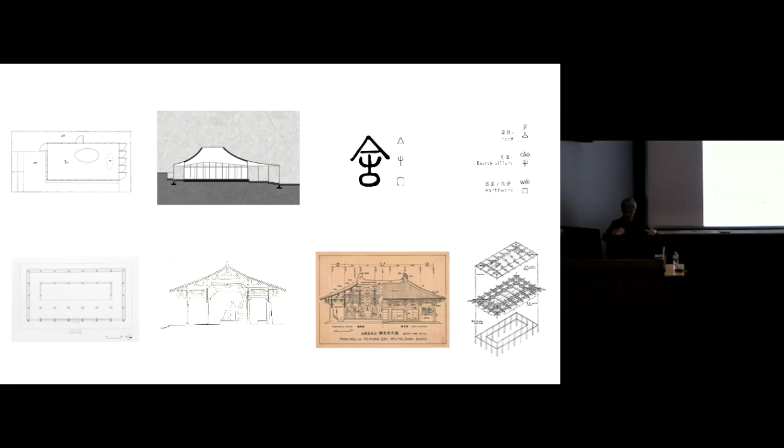The metaphor just mentioned is still used here, but more specifically, the plan composed of the east hall of Foguang Temple is adopted. That is the structure of the inner and outer two circles of columns, called Jinxiang Doudi Cao in Chinese ancient timber architecture. In fact, when discussing the structure of this pavilion with the structural engineer, we found the inner and outer circles of steel columns just provide better lateral stiffness for the slender columns.

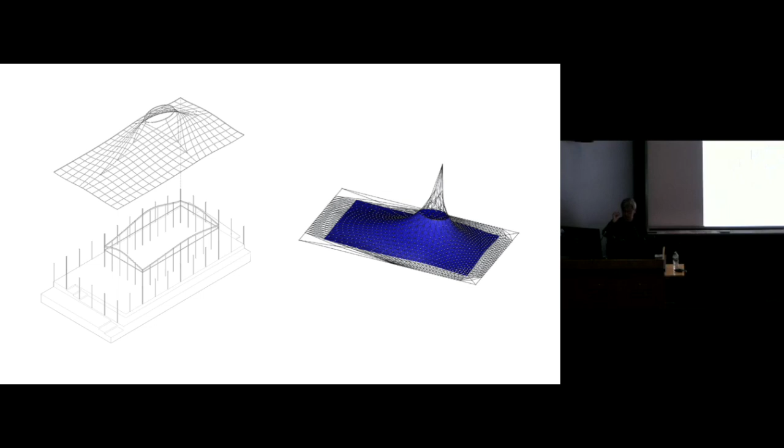The roof is formed like a piece of stretched elastic fabric. The structure is steel belt and polymer mortar. The calculated thickness of the roof is 4.5 centimeters. This is similar to the technique of building a cement boat.

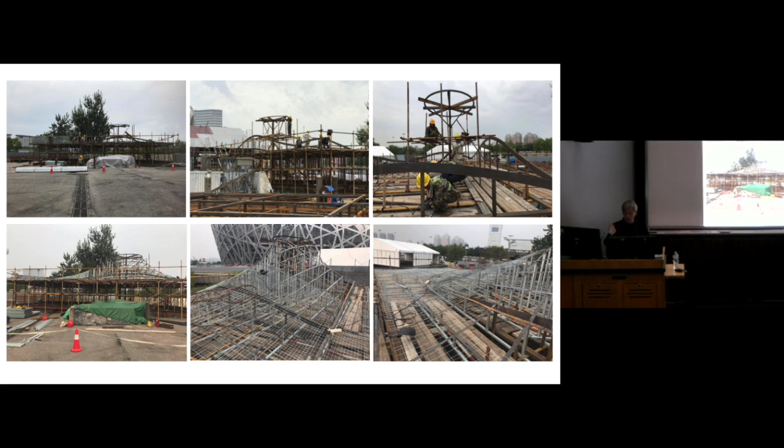Because it is a brand new structural form, to test out the construction of this structure, we made a one-to-one mock-up of it for an exhibition in the Plaza of the National Olympic Games Stadium in Beijing, turning it into an installation of an adaptable living space. This is the process of locating and constructing the steel belts, and applying the polymer mortar.

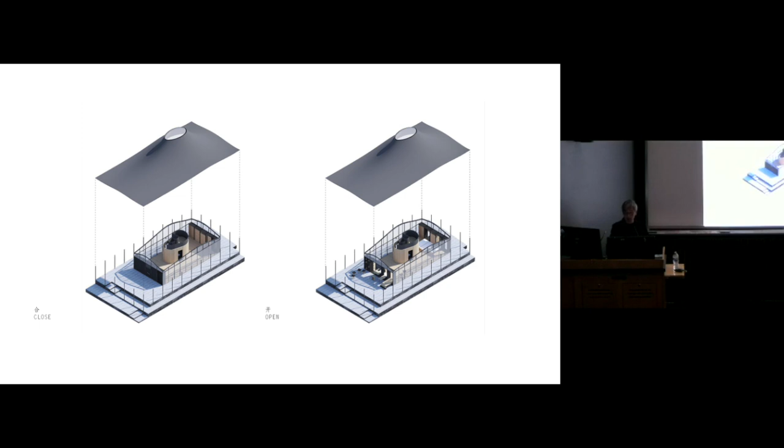The facade of the building is made of furniture boxes that can open or close. Through opening or closing the facade furniture, it becomes an open home for the exhibition. These are the exhibition photos.

But since the polymer mortar on the roof is applied by hand, there is quite much deviation in the thickness of the roof, and it adds to the weight too. When there was a strong wind, I noticed that the roof also rocked a lot.

So I had to consider the security and durability of the hall as a permanent architecture in the mountains. Due to the difficult construction conditions, achieving accurate construction of a curved roof may be challenging, so prefabrication is a reliable way.

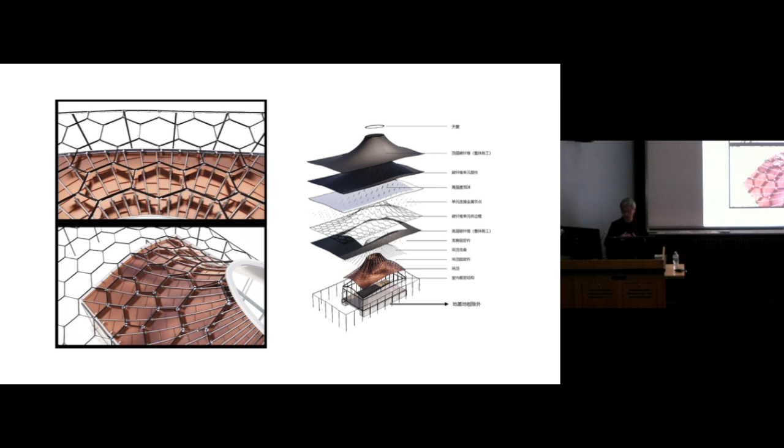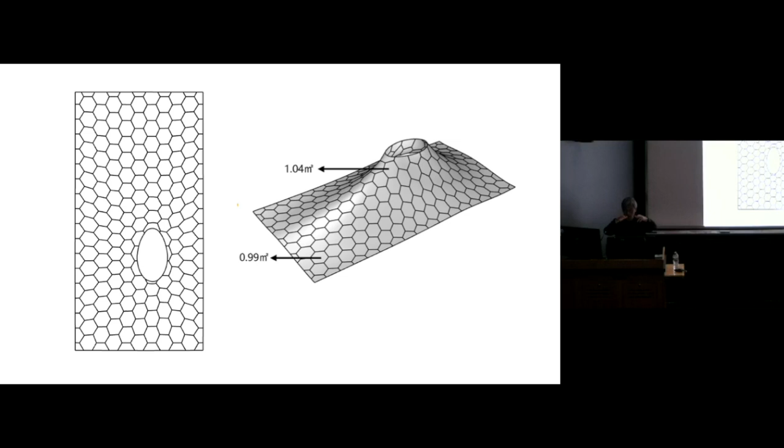So we changed the polymer mortar roof into one with prefabricated carbon fiber. The roof is divided into load-bearing groups of honeycomb sandwich panels. The CNC robotics can accurately process each of the honeycomb curved PU foam. It is wrapped with carbon fiber to become a sandwich structure, prefabricated in the factory and brought to site.

The carbon fiber roof plate constructed on site is coated with special painting to achieve the same texture as the steel plate roof at the top. We let it so it cannot be easily told what the roof is made from. But when a light snow falls, the honeycomb structure of the roof suddenly emerges due to the instantaneous temperature change and the thermal inertia of the materials inside, revealing its structurescape in a surprising way.

The cliffside pavilion in China also has a specific character as a type of building corresponding to it. It's called a yan. This is a view from within the Zen Hall towards the valley and the Great Wall. Left is summer and right is autumn.

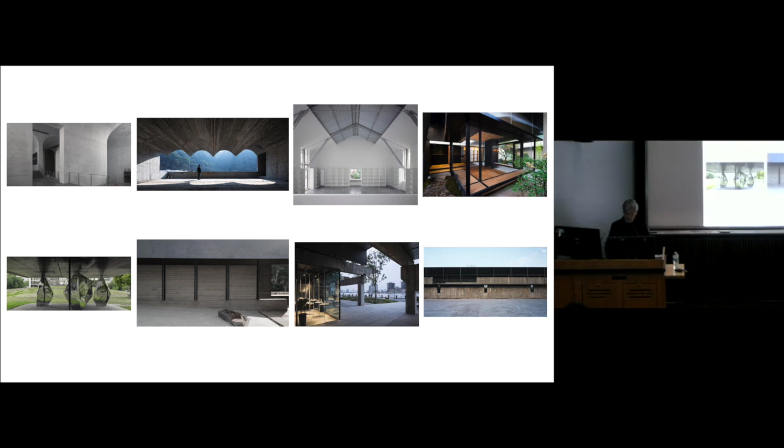Let's go back to the sunshade shelter. The tree umbrella at the archaeological site is still a tree, which is to say part of the landscape. Likewise, the roof remains as an artifact of textile craft. They are together, but not only unified—they are events that have unfolded in the landscape or in the artisan workshop.

This reminds me of the architecture ruins, some of the projects that I just mentioned. The ruin of architecture stands on the ground after the functions are removed. They seem to have become a part of the landscape, and the new structure attached onto them seems to be both separate and integrated with it.

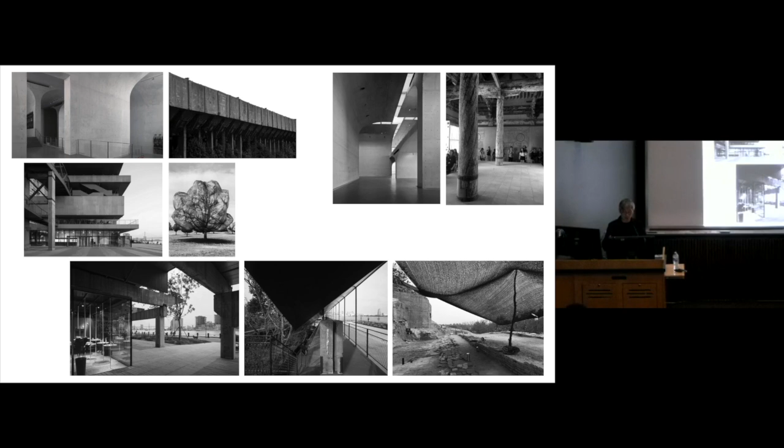There are also projects that use entirely new materials, such as thin steel plates and columns, and even carbon fiber roof plates, which also imply associations with traditional architecture forms, either consciously or unconsciously, but also point to the umbrellas on the archaeological site, which are not symbolic but structural. This is probably the point of the regional construction system, which is the structurescape that emerges from the various related elements rather than a kind of style.

It makes me realize that the poetic tradition is still possible, although I'm not optimistic about that, but it is still worth rethinking and exploring. Or should we still ask, in the future, what kind of basic emotions would still be alive in architecture? That's the question. Thank you. That's all of it.